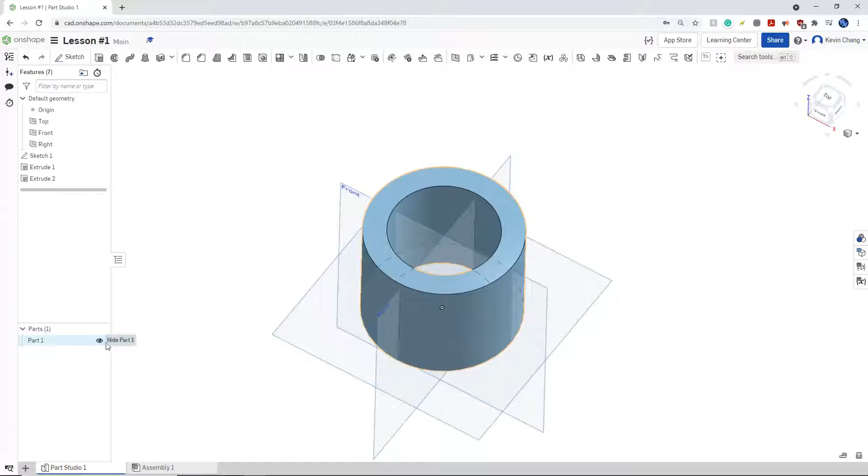First of all, we need to get rid of what we already have. So we can hide it by clicking the eye next to part 1, and then we can still see the sketch from earlier, so let's hide that too. So hide sketch 1, like that. Alright, now we can start on our new part.

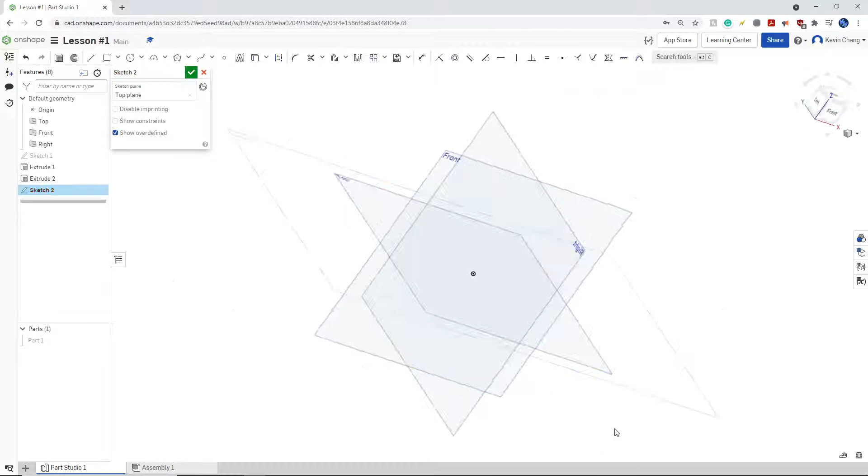First, I'm going to create a new sketch on the top plane, like this. And let's see, we'll use a rectangle this time. Just going to click on the origin and then drag it out and enter dimensions without clicking anything else. Let's do 80 by 50. All right.

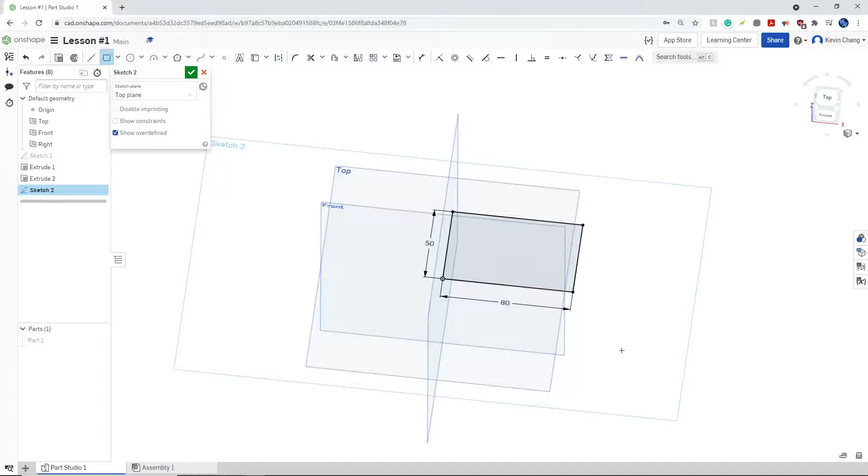Next. Okay, so this sketch is done. This is all you need for one side of the loft. Now we need to make whatever it's going to connect to. So we need to create a new plane for that so we can make a different sketch. And we're just going to go to the plane tool.

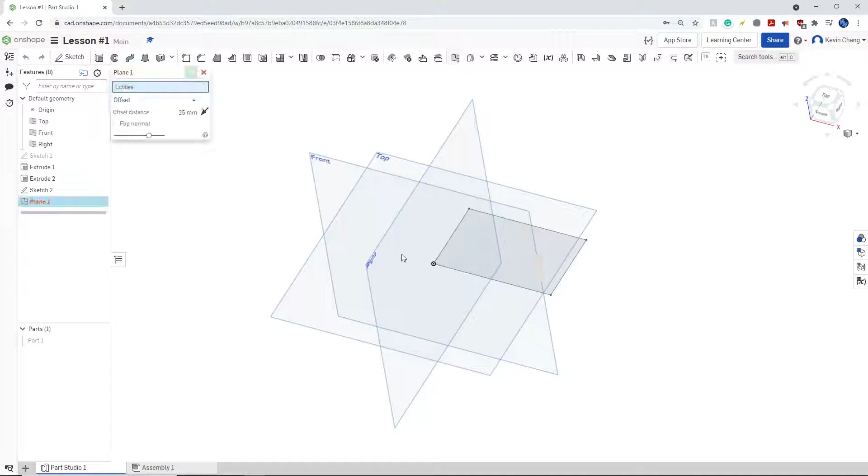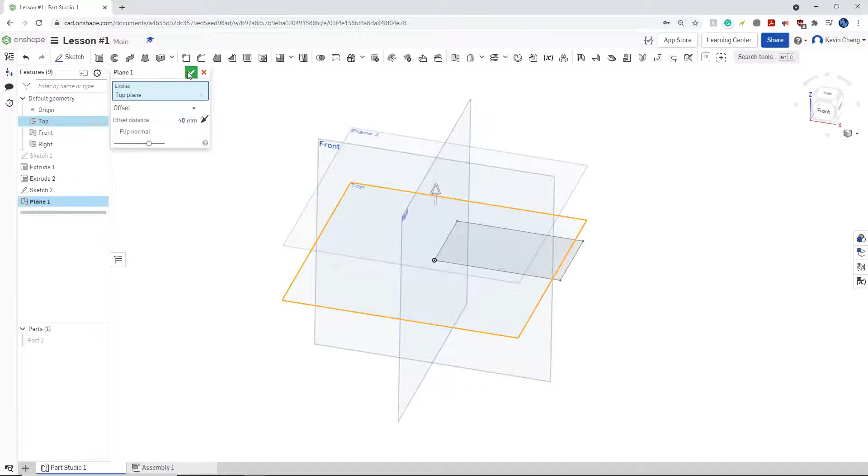Then we're going to click on the top plane and make sure it's set to offset. So we're going to make a new plane that is offset from the top plane. So it'll be parallel to the top plane, but it'll be at a different height. So let's put this thing 40 millimeters above the top plane. The green check mark.

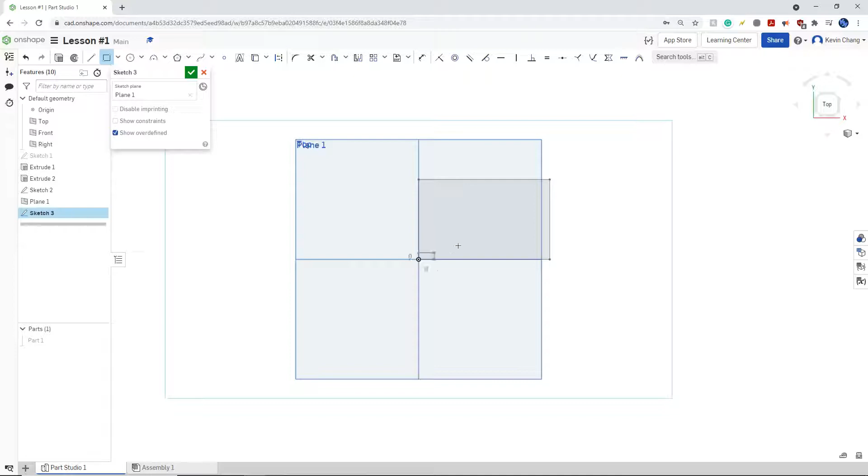All right, now let's create a new sketch on the new plane that we made, like this. And I'm going to press N to center it. And then again, we're going to create another rectangle. Then starting from the origin, we're going to drag out. And then I'm going to make this one 60 by 30.

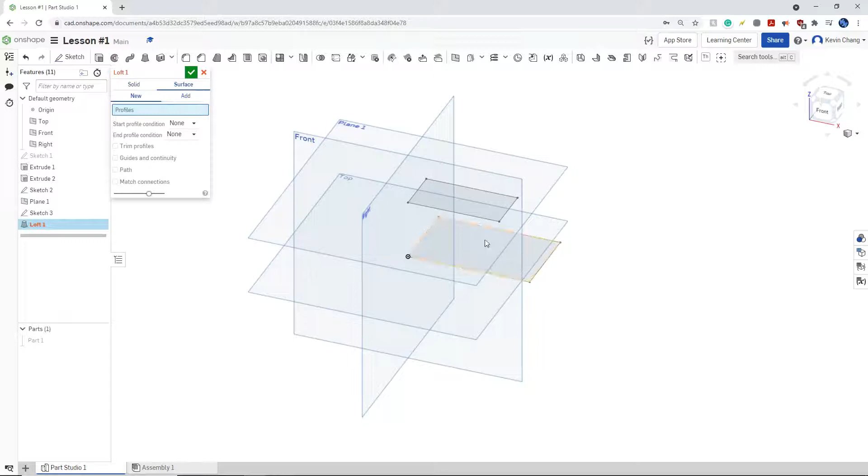The green check mark. All right, now we have two 2D sketches on different planes, and now this is when we can use the Loft tool. So click on Loft, and then we're gonna do surface, because we're gonna be merging two surfaces. And now we can select the profiles. We're gonna select the first profile, then the second profile. And now we'll have merged them, and you just have to click check.

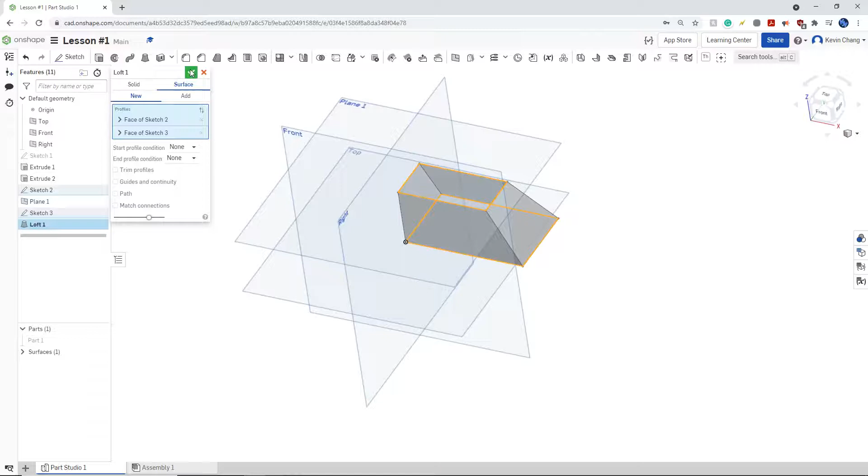And there we go. So basically all it does is connect the lines from your top sketch and your bottom sketch. So we created a sort of box shape like this.

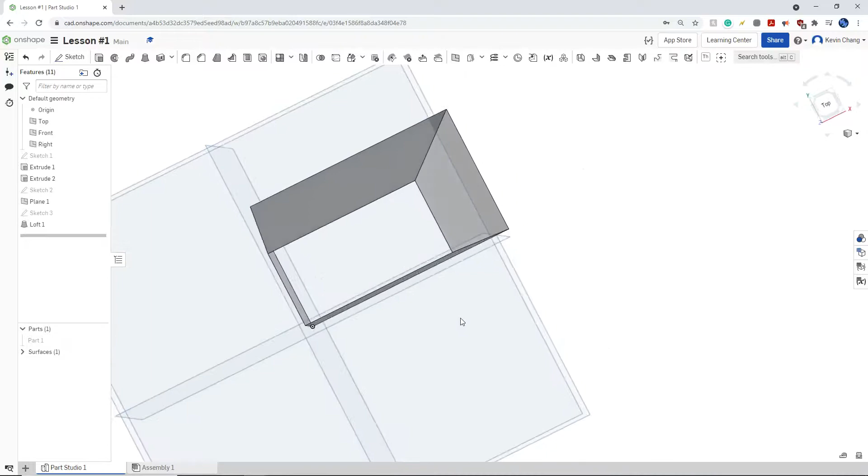And we can also go back and edit our sketches, change how the loft looks. So we can go back to sketch number 2, which is the bottom plane, and we can edit the values to, say, make it smaller than the top plane. So 40 by 20.

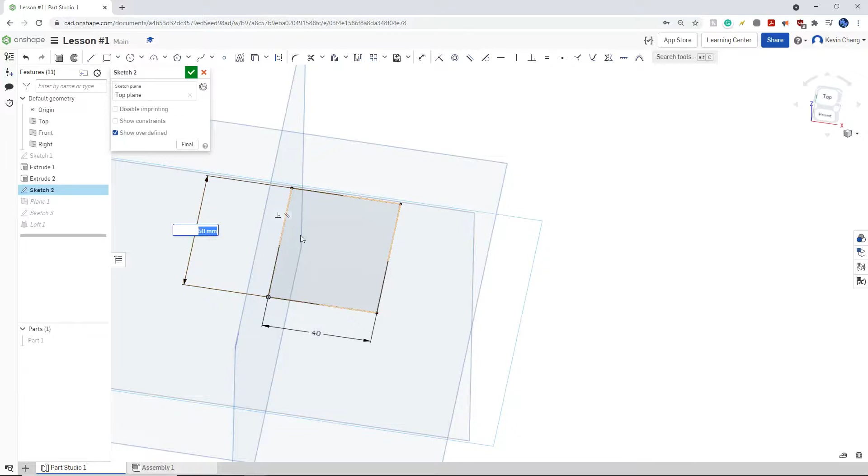Hit the green check mark, and now the Loft tool will automatically adjust. As long as your loft action is after your sketches, you can change anything before your loft action and it'll apply to the loft automatically.

All right, so that is it for today's lesson. That is basically how you use the Loft tool.